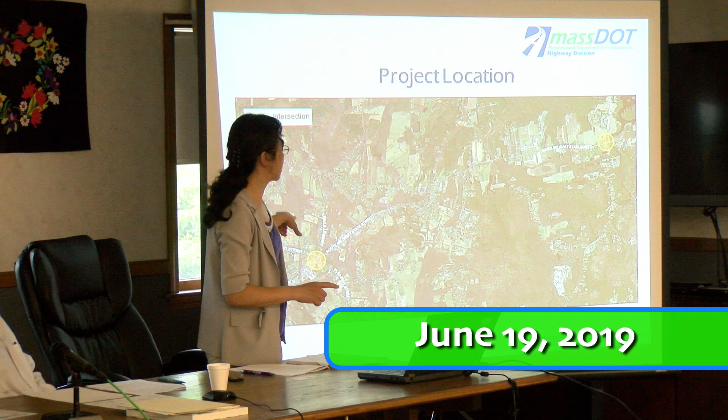This project includes 2 intersection improvements. One is the 5 Corners intersection. Another is the School Street intersection.

Why do we need this project? First, both locations are ranked within the top 5 of high crash locations within the Pioneer Valley Planning Commission's area. And because they are ranked top 5, they are eligible for the Federal Highway Administration's Highway Safety Improvement Program, so they can be funded by federal money.

Here is a brief history of this project. It was initiated in March 2012 because of their crash ranking. To be eligible for federal money, the RSA was required, so in March 2013 our road safety audit was conducted. In June 2015, the 25% design was submitted. But at that time something happened: this job was not funded, so the design stopped.

In 2017, this job was resumed, so we submitted a revised 25% submission. Last year, in March 2018, we had our first design public hearing. After that, we received comments from residents and local officials, so we changed our design. So in November 2018, we did this second revised 25% submission. Now this is the second design public hearing.

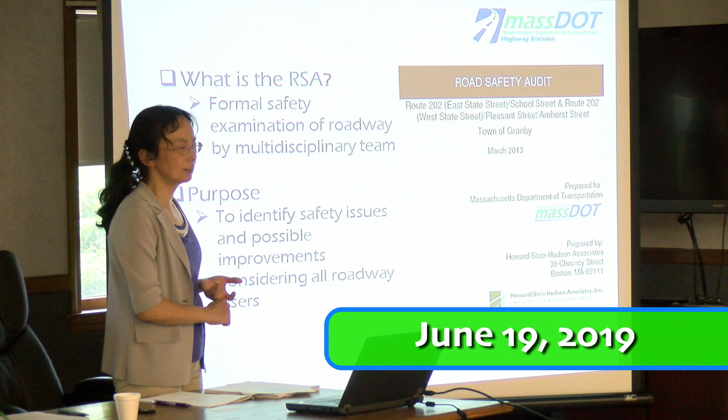So in March 2013, professionals from the Pioneer Valley Planning Commission, Granby Highway Department, Granby Fire Department, Granby Police Department, and the state, along with MacDuffie School's principal and the custodian person, all joined together and walked through these two intersections to see what the problems were and how to improve them.

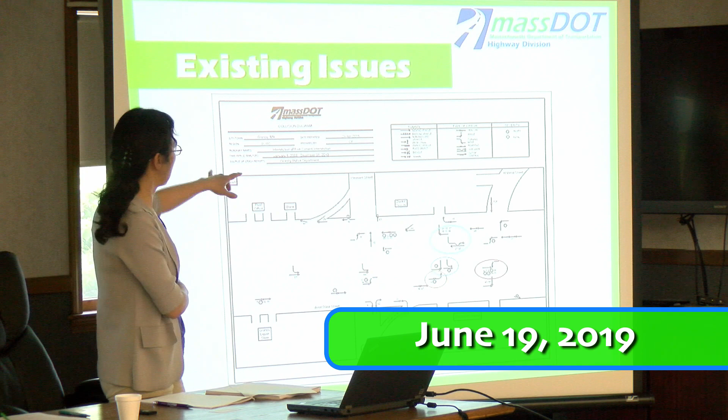In that road safety audit, this crash history was presented. This crash report is between 2008 and 2013. There are 69 crashes in total at the 5 Corners intersection.

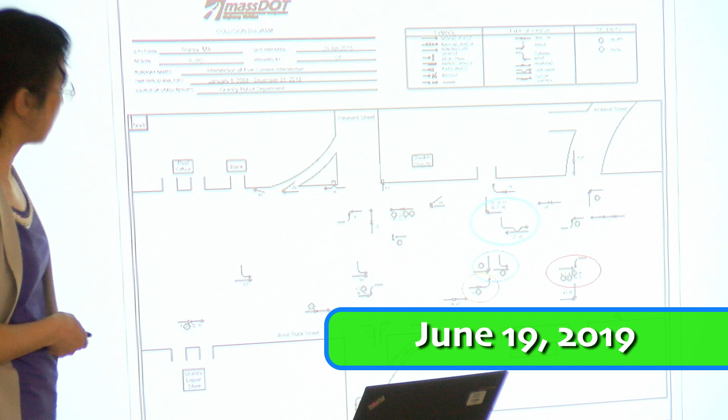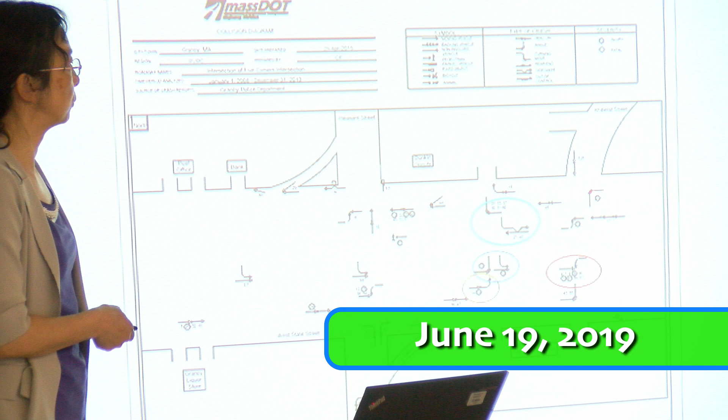The main issue: there are 10 crashes related to cars exiting the Dunkin' Donuts or 5 Corners Plaza trying to make a left turn. There is another group of crashes that happen from Route 202 when drivers want to make a left turn into the Cumberland Farms. So these two big clusters, 1 and 2, are both related to left turns. One is from Dunkin' Donuts, left turn to Route 202. Another is from Route 202, left turn to the Cumberland Farms.

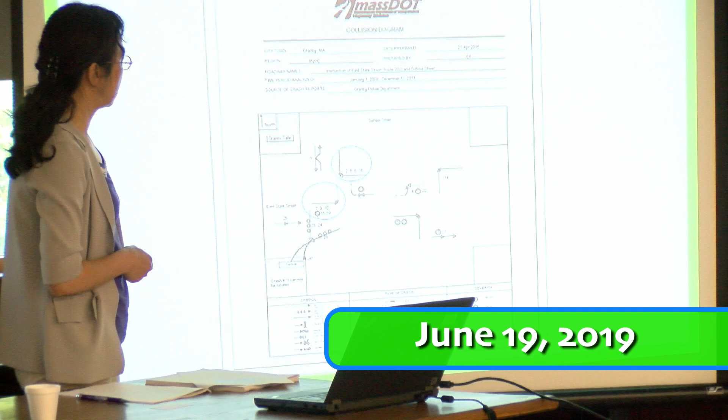This is the crash data for School Street. You can see a big cluster related to southbound School Street, mainly involving the southbound School Street and Route 202 in both directions, westbound and eastbound.

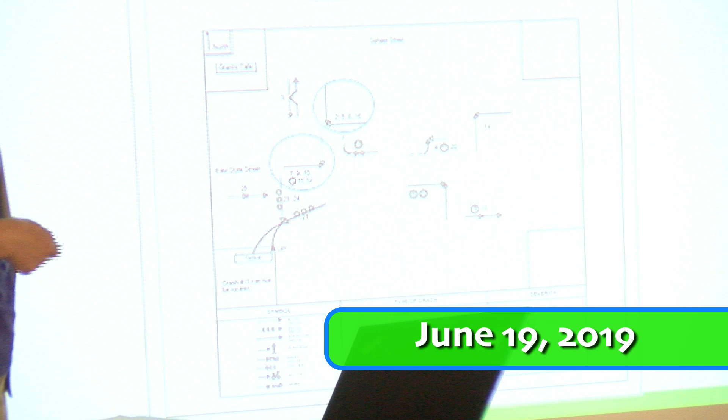The audit team examined the site and identified several issues. First is the intersection geometry. The Amherst Street and the Cumberland Farms easterly driveway don't line up with each other, not perpendicular, so the two left turns conflict. Imagine a driver wants to turn left from here, and then here a driver wants to turn left to the Cumberland Farms. Usually at an intersection, two left turns will not conflict with each other, but this is not the case because they didn't line up.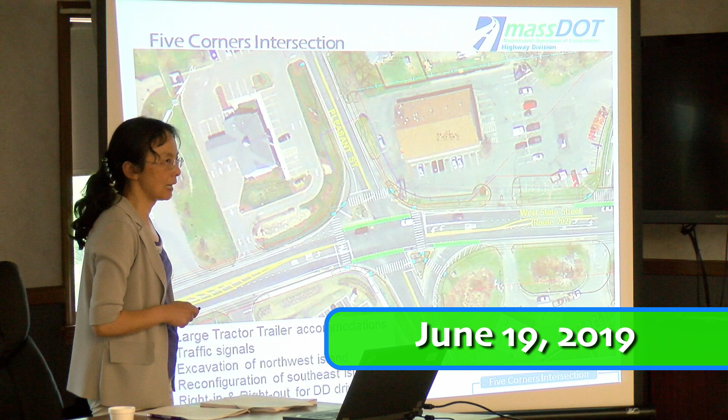So here, focus on my bicycle and the pedestrian accommodation. You can see the sidewalk along the 4 streets here, and the bicycle lane is here. We even proposed some bike lane across the intersection, which can help improve the safety for the bicyclists.

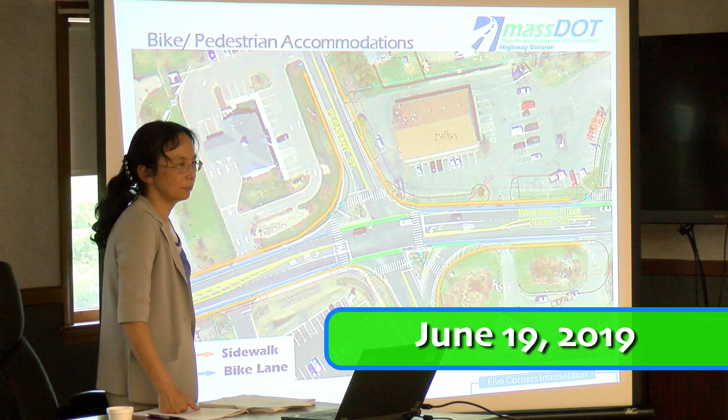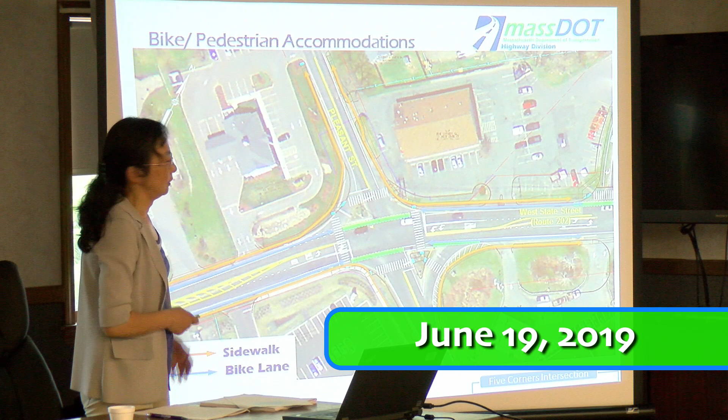In this design, you can see the sidewalk is zigzag. It's because we want to accommodate the utility pole. We want to keep the existing utility pole as much as possible, and only relocate it when definitely necessary. There's a utility pole here, and here. That's why it's a little zigzag.

This slide shows the new design for Amherst Street. Instead of realigning Amherst Street, we will do minor widening and give them a right turn lane. At the last public hearing, they talked about the queue at Amherst Street, so since we have 2 lanes, this will decrease the queue length.

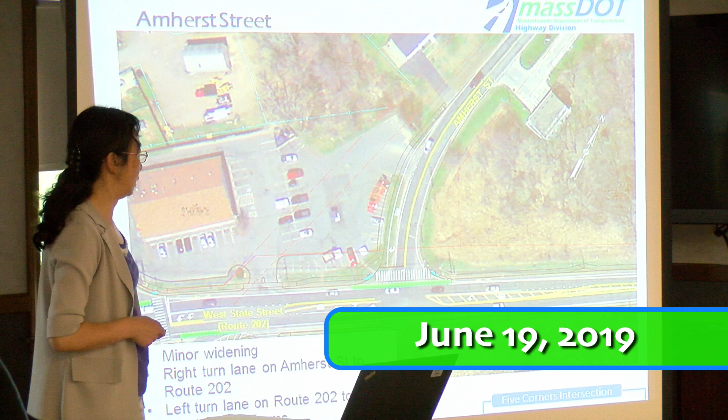We also have this dedicated right turn lane to Route 202, and we added a left turn lane. We will remove this gore area and repave it to a dedicated left turn lane to the Cumberland Farms.

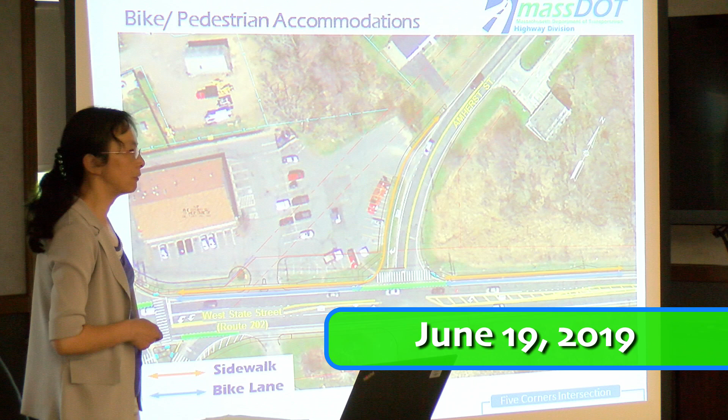For this part, you can see the sidewalk, which will continue over here. For the bicycle, we will give them a 5 foot shoulder, so the bicycle can use this. This is the side.

This slide is focused on what we presented for the Cumberland Farms driveway. Since they didn't line up, if we keep the Amherst alignment, we've got to move this Cumberland Farms driveway. So we basically move it to the east, but this will bring one issue.

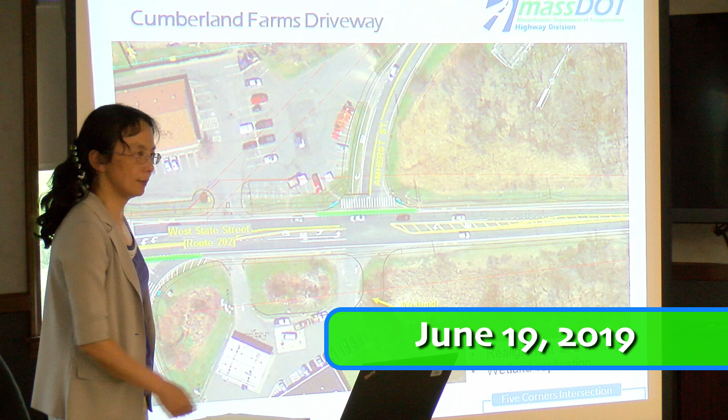It's wetland now, so to move it we have to replicate what we impact. What we propose now is, on the same property, just around here, to give them replicated wetland, still within Cumberland Farms.

On this side we have a bicycle lane, 5 feet across, and the sidewalk.

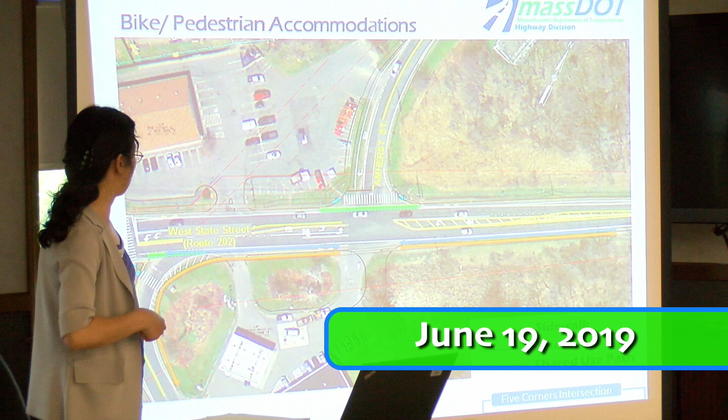For 5 corners, the pavement we do milling and resurfacing, and then we have this left turn lane on Route 202 into the Cumberland Farms. We realign the Cumberland Farms driveway to improve this intersection geometry, and add right in, right out for the Dunkin' Donuts driveway, and a concrete sidewalk, which will last longer compared to the HMA sidewalk proposed.

All crosswalks at the 5 corner intersection are signal controlled, except for Amherst - that crosswalk across Amherst is not signal controlled. There's a 5 foot shoulder to accommodate bicycle traffic.

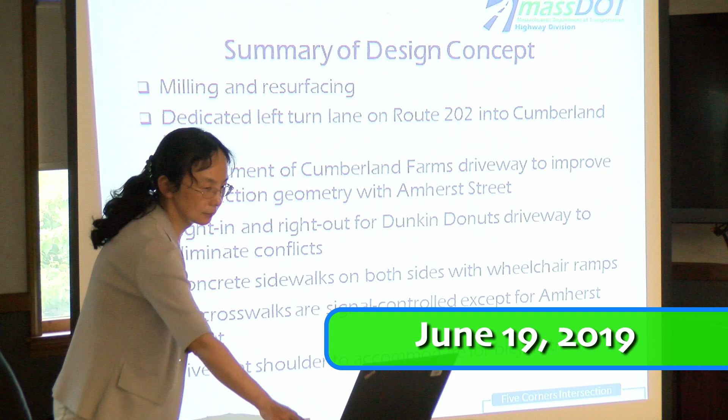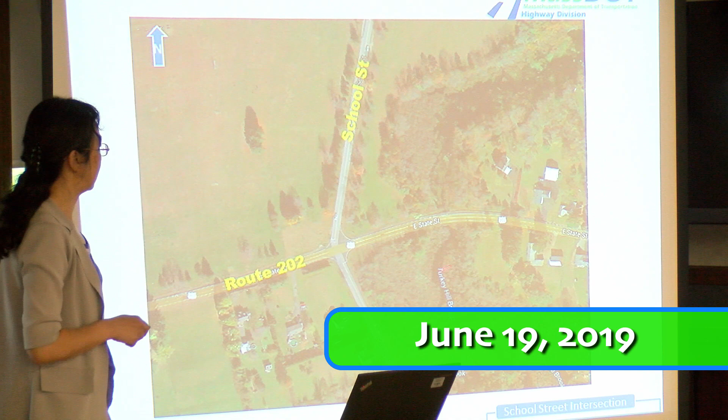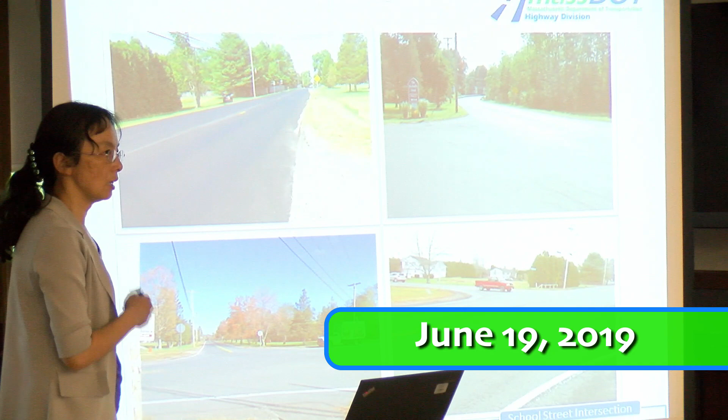So I took several pictures of this intersection. Here the sign is MacDuffie. MacDuffie is on the north leg of School Street.

So here is the design of the roundabout. Based on the traffic volume data, we proposed a 1-lane roundabout. We don't need 2 lanes for the volume we have - we only need a 1-lane roundabout, and we have a truck apron on 2 corners.

You can see the truck apron. We noticed there are a lot of large trucks along Route 202, so this truck apron can help them make a turn here - this is the truck apron in the middle. The passenger car uses this part, and the truck can use this part to make a turn.

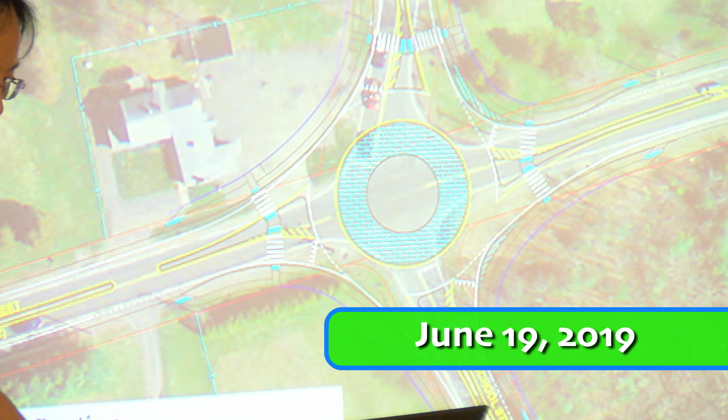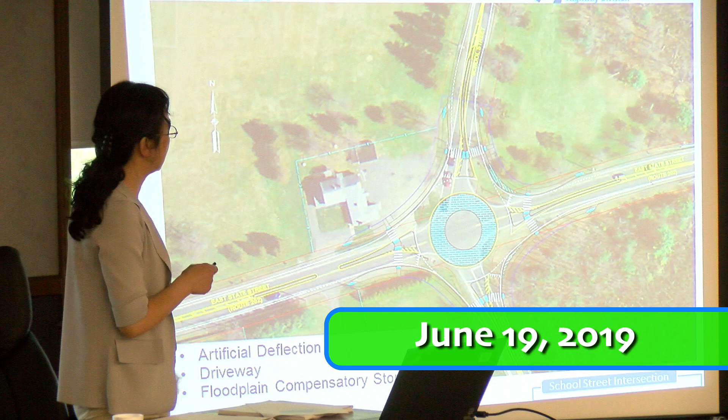There are some features for this roundabout, like we have some artificial deflections. You can notice for the north leg, it comes to this side and then it's curved. The main reason is trying to slow the driver.

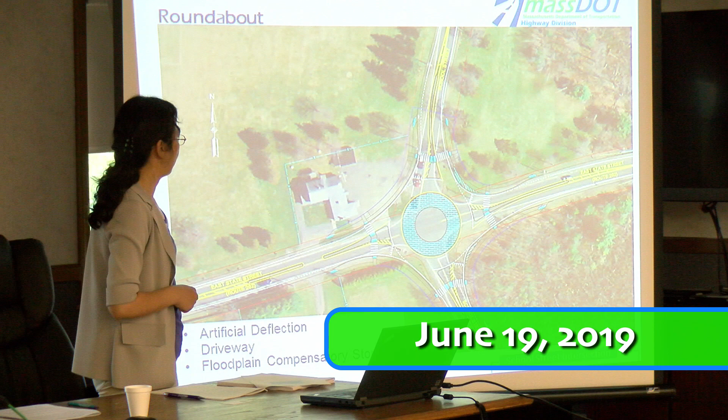So we can make them enter - our goal is for their entering speed to be only 25, which is less than 30, so pretty safe.

The driveway will keep that open for this house. The driveway will keep it open.

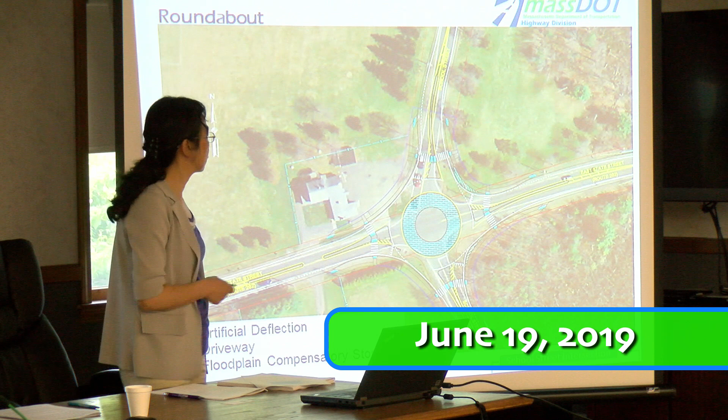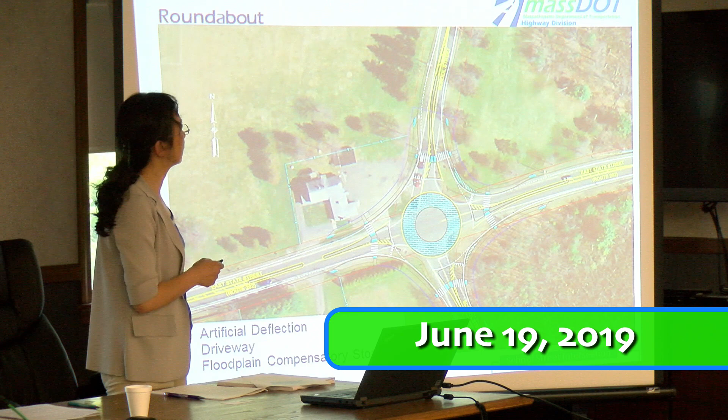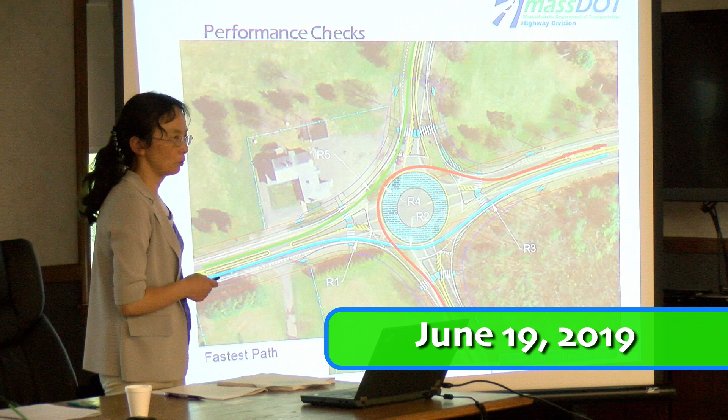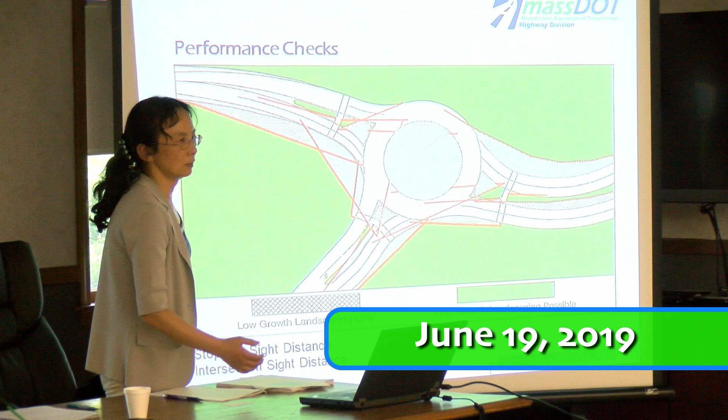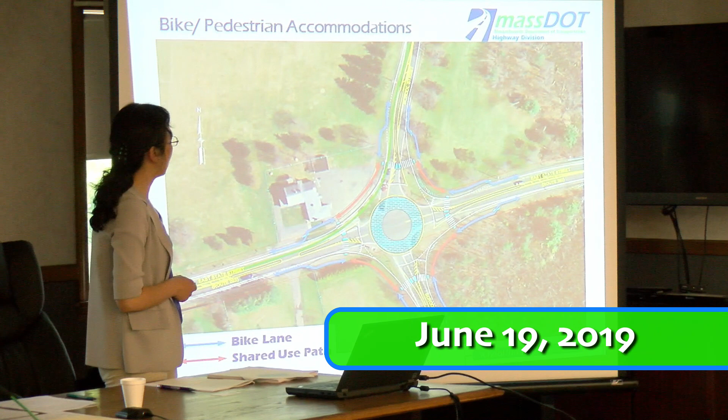After this design, we have several performance checks, like this fastest path, and the next slide is the sight distance check. We just want to make sure it works for the truck and the passenger driver. And this slide will focus on how we accommodate bikes and pedestrians.

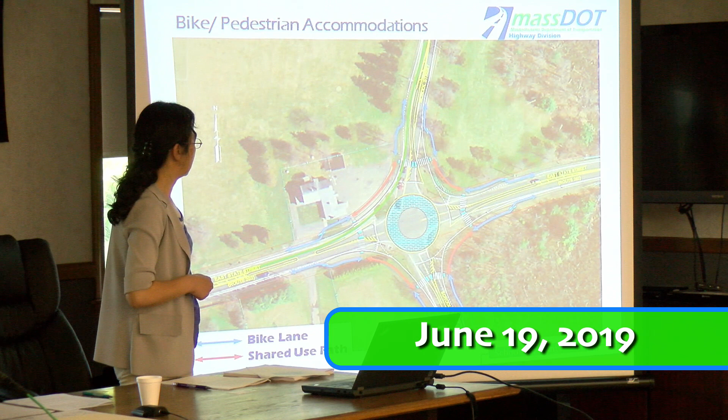Because this is only an intersection improvement, we have this roundabout, so you can see we have a 5-foot shoulder. Before it reaches the roundabout, we use a bike ramp to guide the bicyclists to this bike lane, away from the passenger cars, which can improve their safety. So the bicycle basically will come this way, use this bike ramp, come here, use the shared use path, and then cross and continue to go, or make any turn.

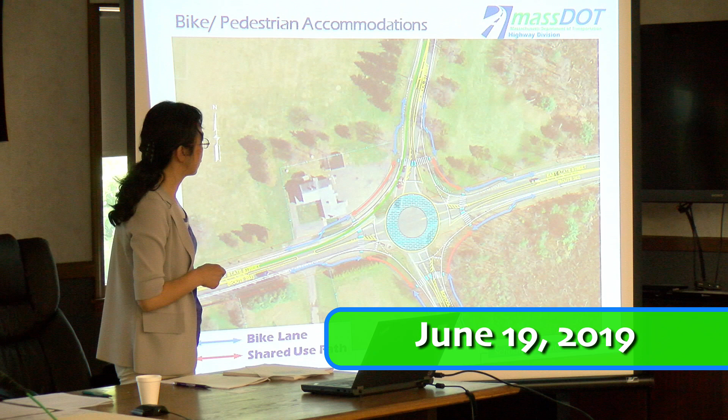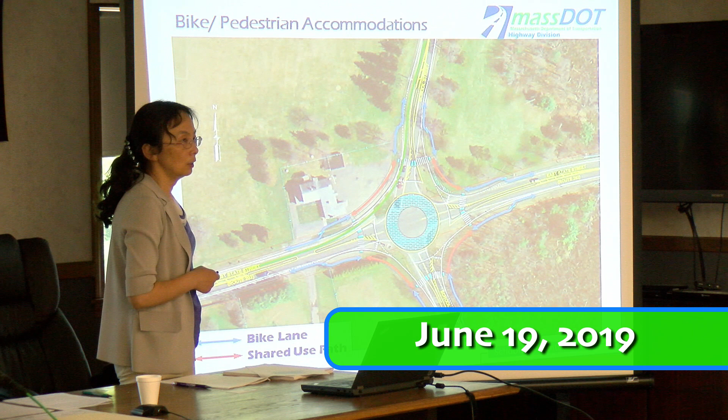For the pedestrian, at this stage, since that's an intersection, pedestrians are limited to this, like 4 corners. We provided a wheelchair ramp, crosswalk, and shared use path between these two ramps, so pedestrians can move around this roundabout without difficulty. In the future, if we have a project to extend this sidewalk further, this basically provides a base for that.

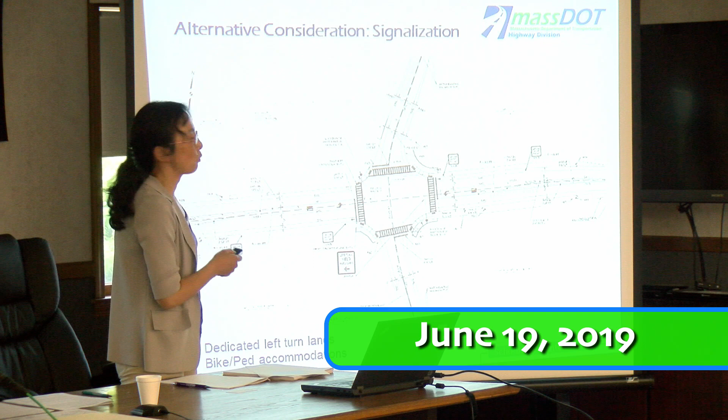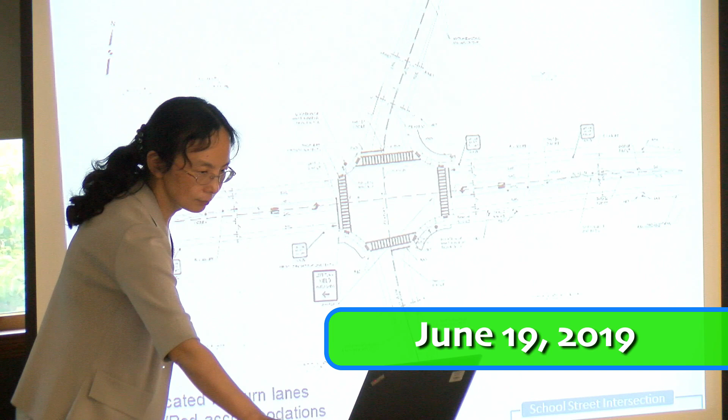This is just presenting what we thought before last March 2018, which is the signalization of the School Street. Compared to roundabout and signalization, the initial cost for the roundabout is pretty high. But if you project 5 years out and think about the maintenance after that, so added together, in fact the traffic signal costs more.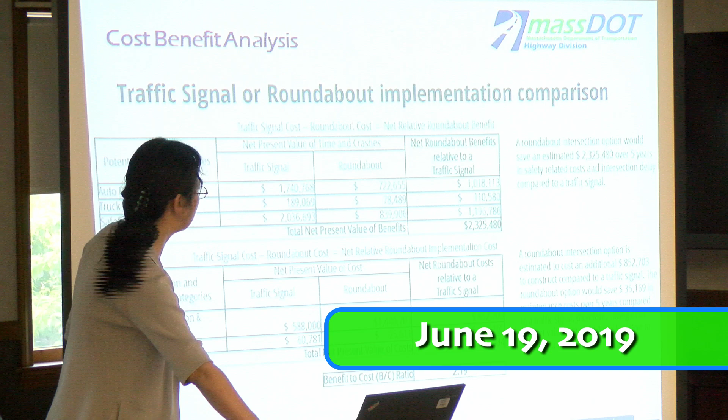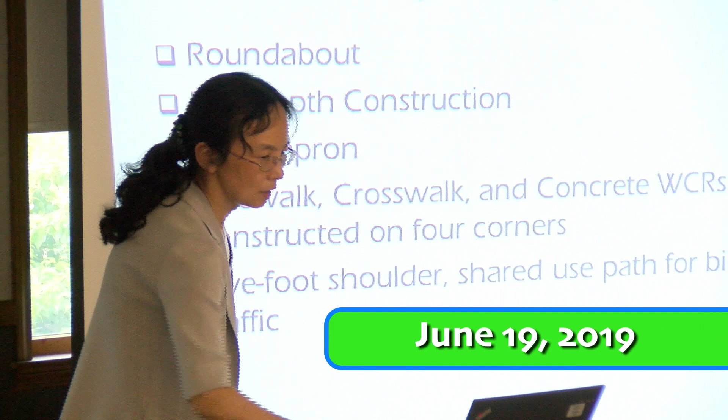This is a cost benefit analysis done by a consulting company for this location. Here they have numbers showing the net present value of cost savings, so about how much can be saved in the long run. So for school street improvement, it is a roundabout.

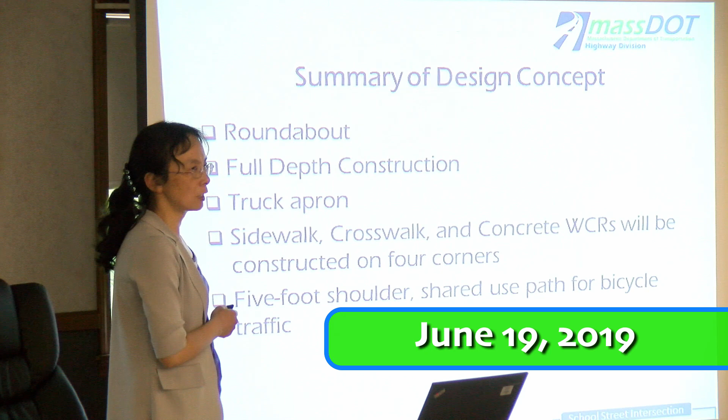Since we do a roundabout, for pavement it will be different from 5 corner. 5 corner will be milling and resurfacing. For school street, we'll do full depth construction because we need to excavate everything and put the roundabout in. We have truck apron, sidewalk, crosswalk, wheelchair ramp, and 5 feet shoulder.

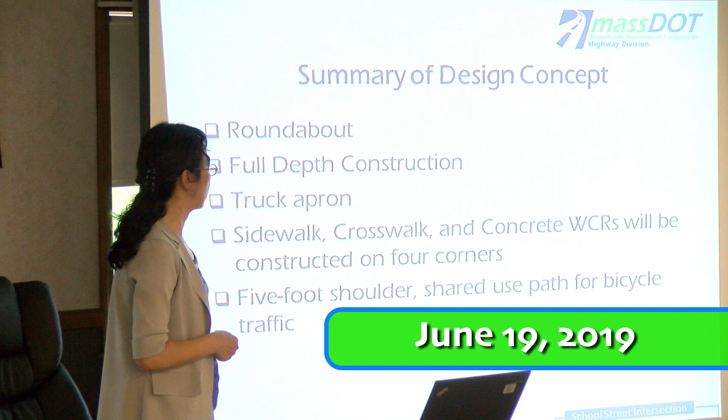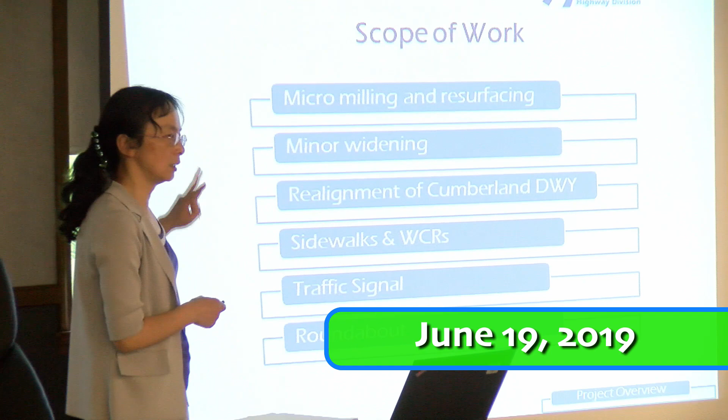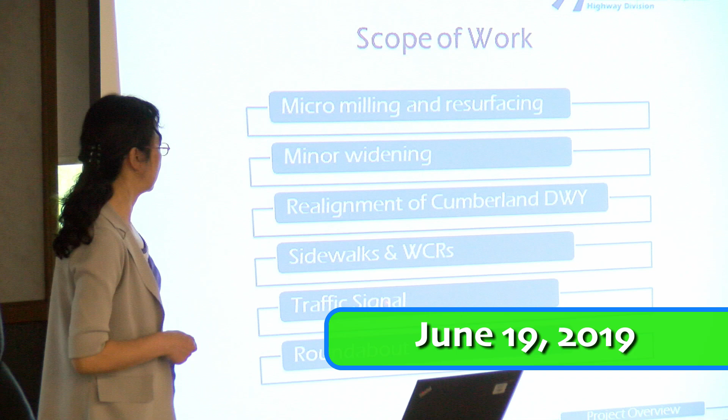Okay, here this is just the summary for this whole project, summarizing the 2 intersections. So milling, resurfacing, minor widening, realignment, sidewalk, traffic signal improvement - that's for 5 corner, and roundabout for school street.

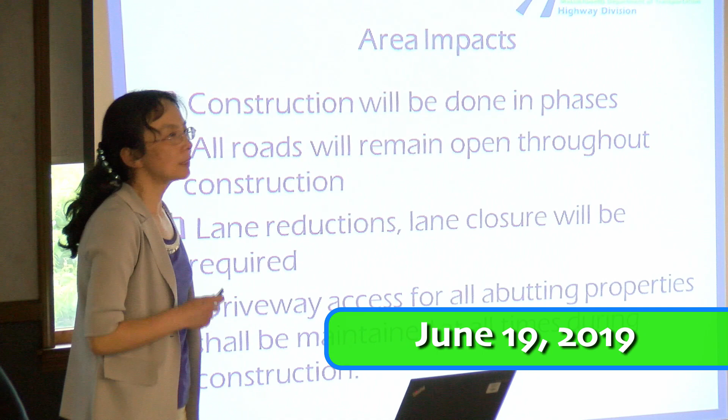How will traffic be affected? When we build the intersection, construction will be done in phases because that is the intersection. We'll try hard to maintain all the roads throughout construction, but lane reduction, lane closure will be required. Maybe that will be one way sometimes. But the driveway access, we will try to keep. This will protect local business. Driveway access for all abutting property will be maintained at all times.

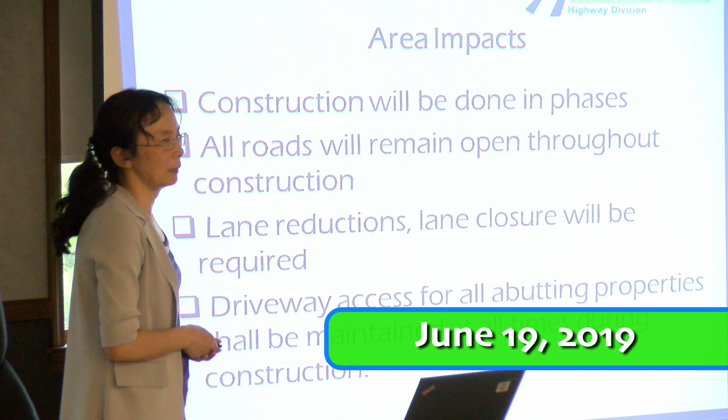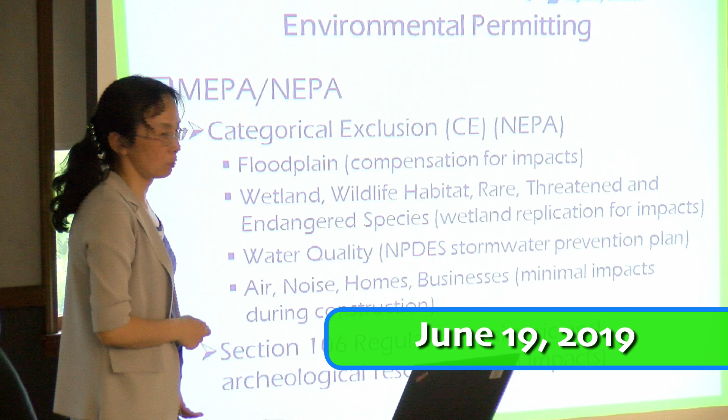Because we have wetland replication for 5 corner and floodplain compensatory storage, we need environmental permitting, which we're asking for. It's not approved yet, but it is required by law. We will do it.

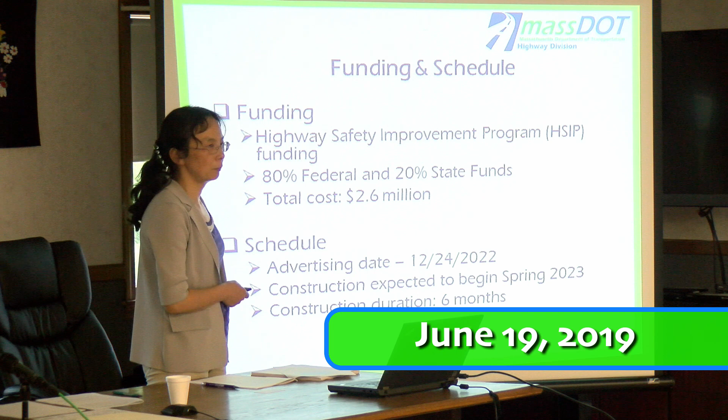So for funding, the federal will fund it at 80%, and MassDOT will fund it at 20%. The total cost for these 2 intersections so far, estimated, is 2.6 million. The advertising date will be 2022. So we may hope it will be built in spring 2023.

For this project, after this public hearing, after today, we will proceed to 75%, 100% PS&E, then we will advertise this job.

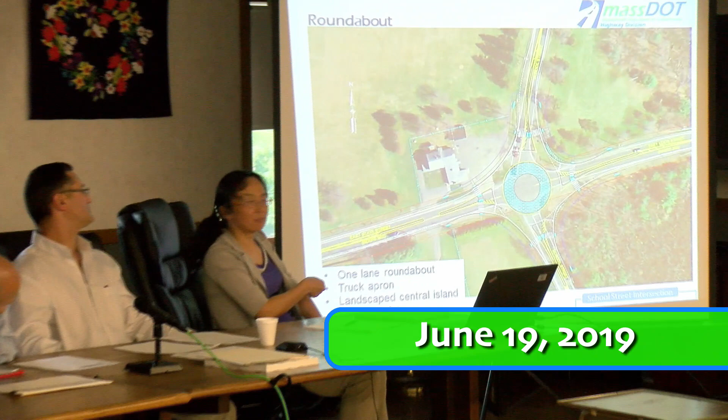Not all, here it's open, we leave that open. Look, this driveway is for the residents, and this one is for the future, so it's conceivable that could be developed on that smaller property. Yeah, we keep this driveway open.

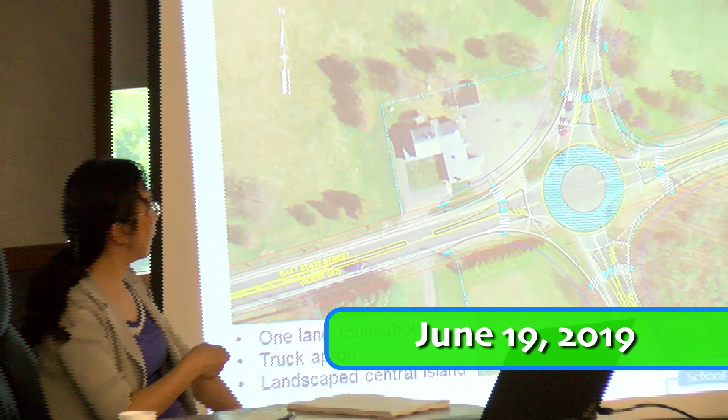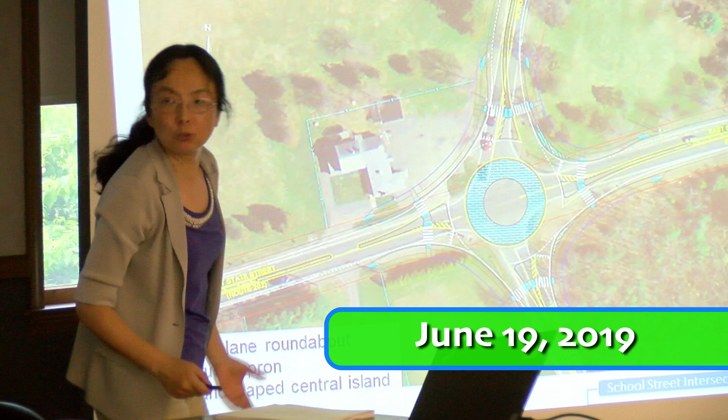But before, we have so many driveways. We have one here, an opening three here, and four opening here. But we have to close that too. Yeah, so this one still has an opening.

Okay, just in terms of keeping one lane open in either direction, my assumption is you'll have somebody working point duty for that. Usually it's a police officer when we alternate traffic in one lane.

I would be remiss if I didn't encourage you to do the bulk of the work when school is not in session. Happy to talk to you about that, definitely. Our semester ends as of May, our construction season will start then. It's perfect, right around June 8th, we're usually done around that time, but we cannot guarantee you anything.

In terms of my concern using that intersection about the speed of cars on 202 relative to the speed on School Street, I know your intention is to try to slow everybody down to 25 miles an hour. I want to indicate, for residents abutting who are worried about losing their land, if you're interested in any redesign that puts that circle a little to the north to slow the east-west traffic down, MacDuffie School will be willing to engage in discussion about offering up a little more land for that project to be shifted slightly north. I don't know if it's a click-and-drag situation for you, but if that helps slow down the east-west traffic, we'd be happy to engage in that.